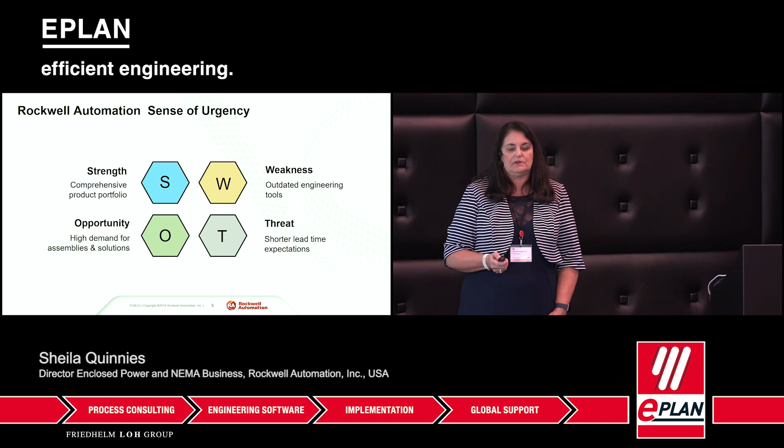And we really started digging into it about 3 years ago, really. When you start looking at how far we've come in the last 3 years, it's pretty exciting. Preparing for this conference gave us a chance to look back and reflect on what we have done.

One of our major activities was to sell more Rockwell Automation parts, services, whatever that was. It's really an ecosystem. We have a strong distributor base working hard to sell our products and services to customers. Then we have Encompass Partners, people we bring into the fold that sell products we don't touch, but help our customers automate their lines. We also work with systems integrators, original equipment manufacturers, and obviously the end users.

As we started looking at this, EPLAN really enabled us to optimize our processes as a whole. We took on way too much all at one time, but looking back, I don't think we'd be as far along if we hadn't jumped into that pool and just started figuring out how to swim.

EPLAN is a good enabler for us, but one thing I mentioned before is whatever automation we put in for ourselves, we have to be able to do that for our customers too. Another speaker said if you don't have your products and data attributes in the database, in the parts library, you're not going to be a supplier. We recognized that and wanted to make it much easier for our own customers.

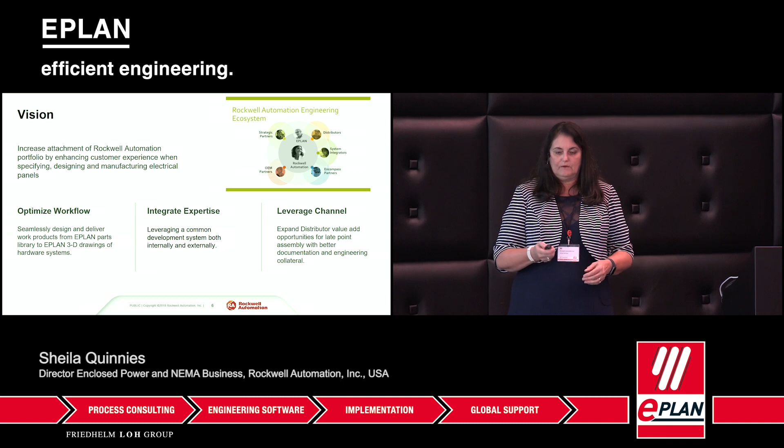So we really saw this as a full life cycle as we went forward with what we wanted to attack. Let me tell you about the good, the bad, and the ugly of what we walked into. We had a big burning platform, a big sense of urgency to do some things.

Before putting in a whole slew of automation, we cleaned up the mess that had grown over 30-something years by different engineers. We modularized our products. Everything was on the table. We looked at reducing the number of enclosures we have, because you struggle with lead time on enclosures, so we wanted to get some standardization.

We changed the power wires we used, limiting the number of power wires and reducing assembly operations time. We also looked at our bill of materials. We're a strong SAP user, using KMATs, configuration variants. We felt that if we could modularize these KMATs like we modularized our products, we'd start taking the friction out of the processes.

So we really had some success standardizing, modularizing, and optimizing our processes. While one team was figuring out the technical attributes of EPLAN, we had another team cleaning up the mess at the same time.

You can see the results: when we first started, we had over 3,000 bills of materials a month with errors, taking on average about 50 minutes to resolve each, from the time it hits the floor to the front office to the engineer and back to the floor. That's 3,000 times 50 minutes, or 2,500 hours a month of downtime. Now you know why your products cost so much. With EPLAN and modularity, we were able to take our BOM errors down to less than 100. It's been a great success for us.

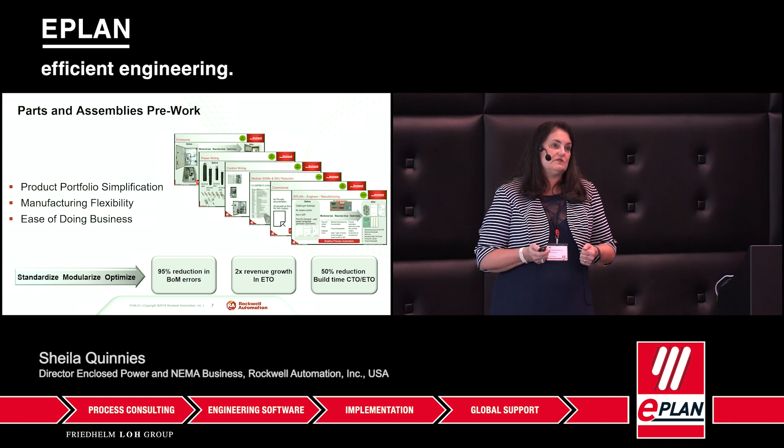So as you look at our overall journey, we had the legacy products, the legacy tools. We had to get rid of those. We wanted to migrate to database and rule-based systems because it's going to give you so much more capabilities, putting it in, being data ready. How do you look at your products differently from an engineering perspective to be a data attribute?

What data attributes are important? So we really started leveraging the tools from EPLAN. And then we did what I call a proof of concept. We partnered with EPLAN to understand it and build it. We took a small assembly and really wanted to test drive the tools and try to prove to our senior management that it was something that was doable.

So as you can see, we had some pretty significant improvements in reducing our engineering time. That helped us to grow. We didn't have to let people go. It just enabled us to go after more business.

And then what you'll really see that's kind of exciting is what they've done with the systems architecture from our systems and solutions that Christoph's going to talk about in a little bit too. All this automation is really preparing us for the future. We really have to do the work to put in the cloud, the virtual reality, AI, all the stuff that you're starting to see becoming more stable. This will better prepare us for that, for the future.

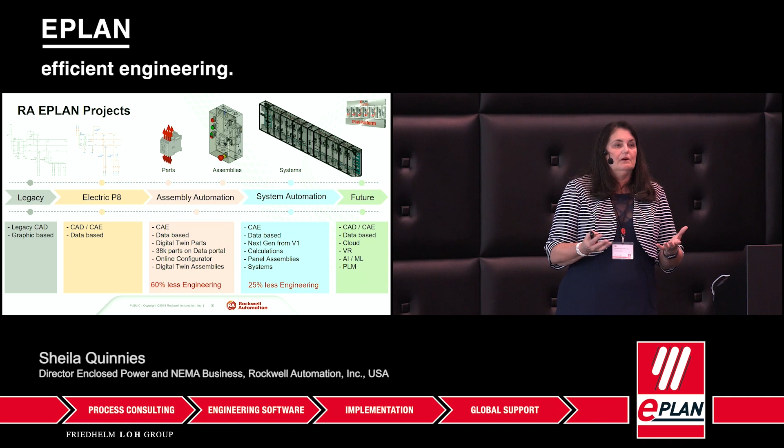Hello, my name is Adrian Kuszper, and together with Agnieszka Saboa, we're going to talk about automated parts generation. We're part of the Rockwell digital engineering team located in Katowice, Poland. One of our main responsibilities is to create the EPLAN parts for a Rockwell parts library.

As Sheila said, we have over 400,000 parts available in our portfolio, and it's not possible to create all of them quickly at once. So in the past we created a schedule using the 80-20 plan, which means by creating about 20% of catalog numbers, we can cover more than 80% of our sales revenue.

But then we asked a question: what about the rest of the 80% of catalog numbers? Or what about the highly configured products that we have in our portfolio? They have pretty high sales revenue as well, so we need to somehow create them too. And it's a huge effort to do that manually, so we decided to use EEC for that.

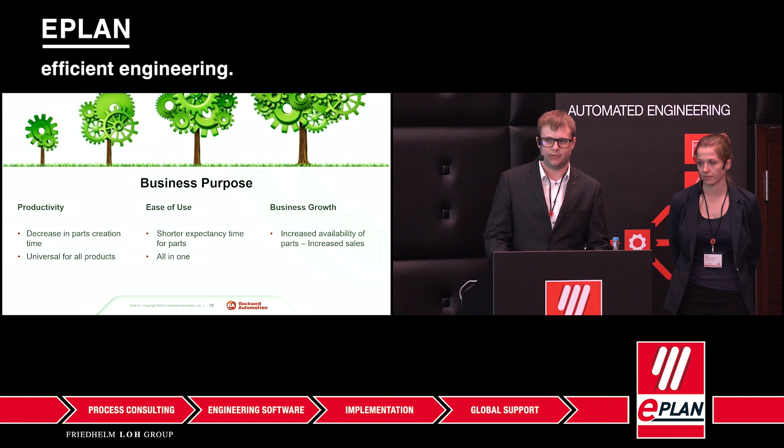What are the advantages of this approach? It reduced the parts creation time significantly. The automated creation is much faster than the manual creation, I think that's clear. Its created model is universal for all the products from a specific product group. It's easy to use. The end user receives the package of data which they need for the projects, and it increases the sales volume. The more parts we are able to generate, the higher the probability for the customer to use it in the project and in fact to buy a product.

Here we prepared an example. Together with Agnieszka, we created an EEC model which is able to generate the parts for an operator device product family, and this is actually our proof of concept that it's possible to automate part generation, and it's actually working very well. This product family is highly configured, so there are billions of possible catalog number combinations.

Once the model was developed, we measured the time it takes to create the part manually versus to create a part using EEC. The result is 15 minutes to create the part from scratch manually, and 30 seconds is the time that EEC needs to create a package of data.

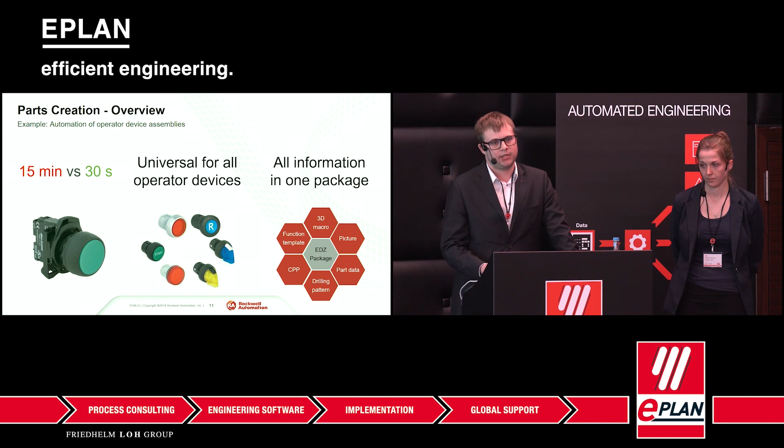This model is universal for all operator devices, like, for example, push buttons, selector switches, pilot lights, e-stops, etc. In the end, the user receives all the information as one package of data, which contains the 3D macro, connection point pattern, drilling pattern, and all the technical data that the engineer needs for the project. Now we can dive into details.

Is this working? Okay, so I will tell you briefly how our model looks like and what we needed to do to make it work.

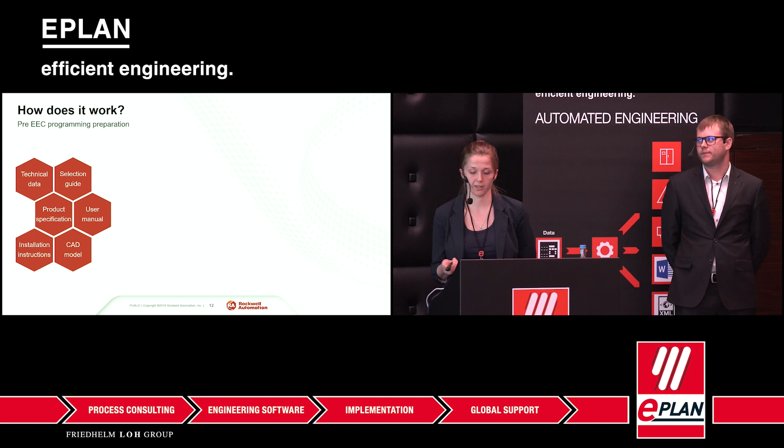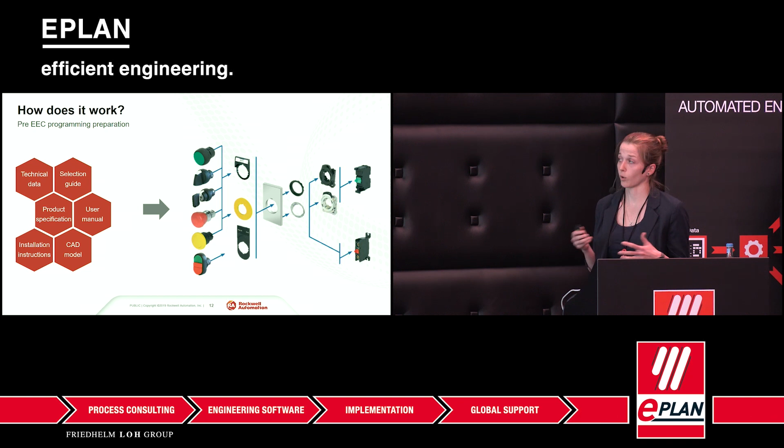First, one needs to go through the whole bunch of technical documentation, like product specifications or installation instructions. The information we want to get from here is what elements are needed for our final part, what are the rules for those elements to combine with each other, and what are the characteristics and attributes of our final part.

When we have this data, we can move to EPLAN, and then we take all the rules and all the data and convert it into the EEC model. We create the necessary libraries with components, build a structure, and apply dependencies between those components.

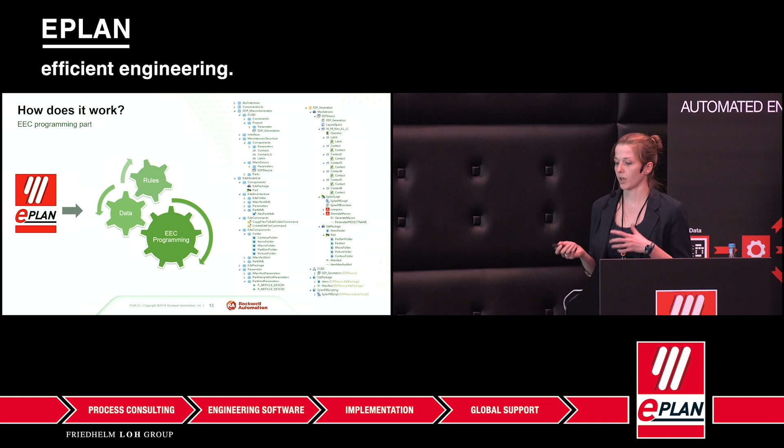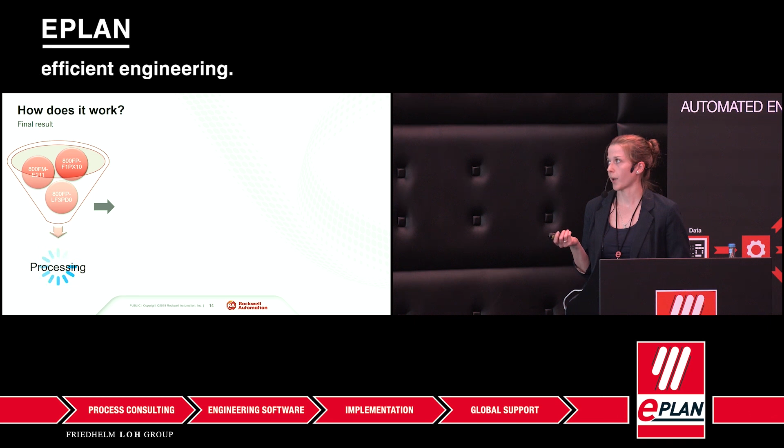Our model's only input is the bulletin number. Then through the EEC generation, we get the package of information that contains everything we need. All you need to do now to be able to use the part is import it to your EPLAN database. And now we have a short video.

I hope it's running. Yeah, so this is our development environment. Here we put our catalog number and we run the generation. This is our output folder. In a moment you will see when the EDZ file appears.

So here is our EDZ file with all our data. Now when the installation is complete, we move to EPLAN. Here I have an empty database, and I go for import of the EDZ file.

And here we have our part. We have all the necessary information that we need. We also provide multilingual input. We have all the descriptions and everything.

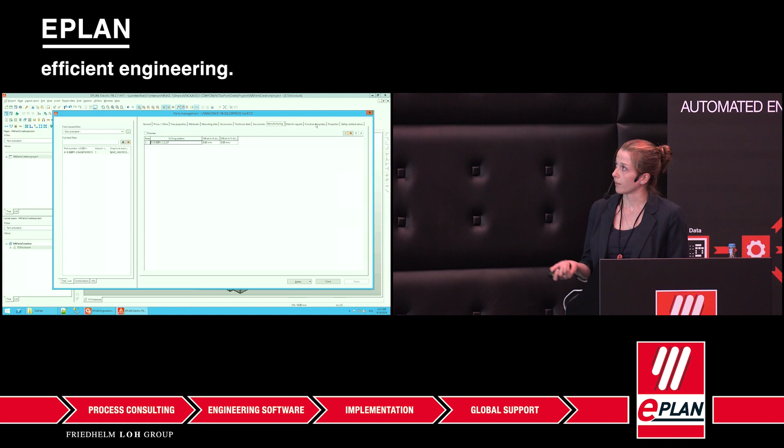We have our mounting data with 3D macro and the picture, our technical data with connection point pattern, the manufacturing data with drilling pattern, and a function template. It is also configured in EEC, and we can assign properties here, not so many because it's just a push button.

And all you need to do now is just insert the device. And since we have only one, we go with this one, we can place it on, let's say, the door.

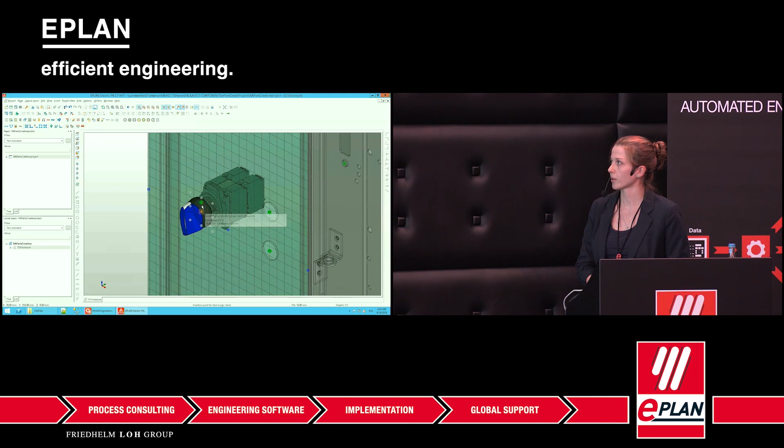And it contains all the information, like our connection points and the directions for the connection points. We also have the information about the drilling pattern.

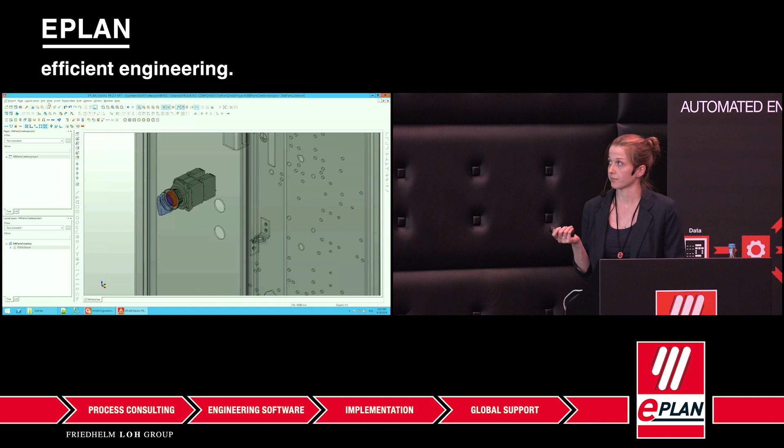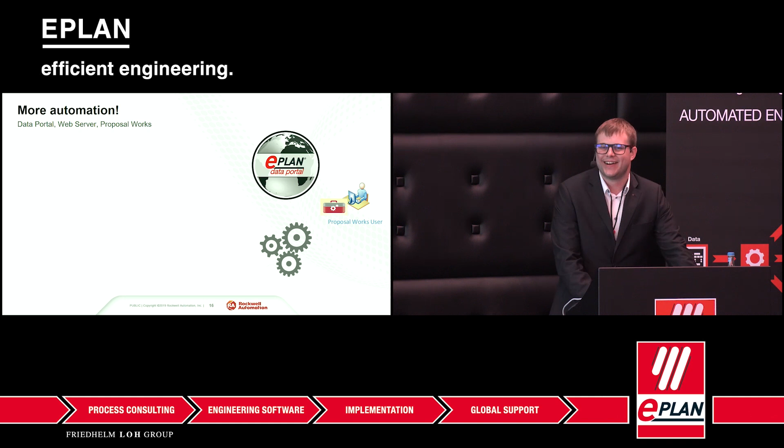Hello? Oh okay, it's working. Okay, what are our next steps with this solution?

First of all, we want to make this solution available for the end user, for the customer. We're collaborating with EPLAN to implement our model and our proposal configuration on the EPLAN data portal, and we also want to implement our model on our Proposal Works software itself.

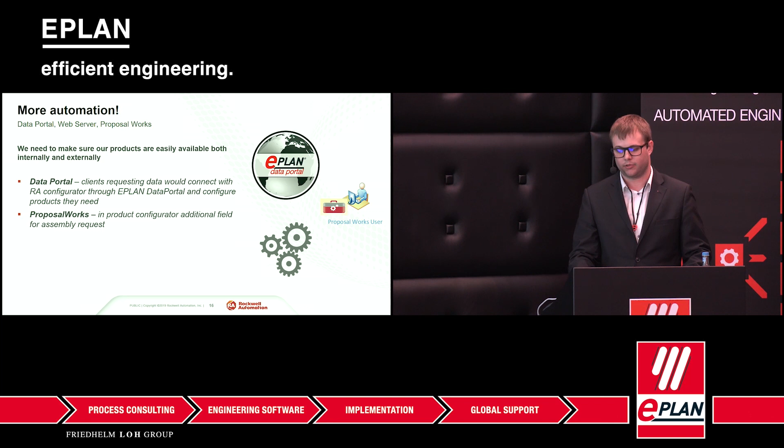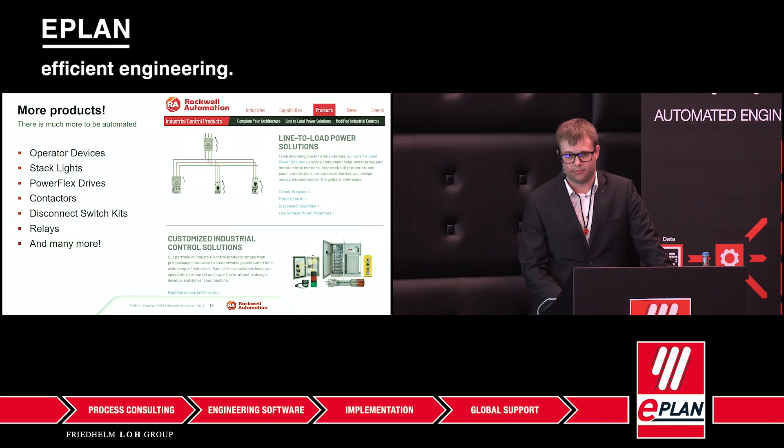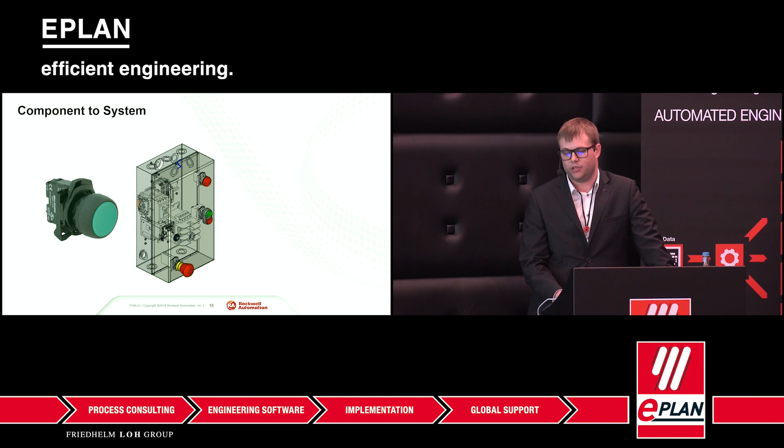Why is this important from a system perspective? Every time we need to start, we get all the individual parts. Then we can use all the individual parts to create an assembly. And then we can use assemblies which we can build into the systems. And now we can move to the systems itself.

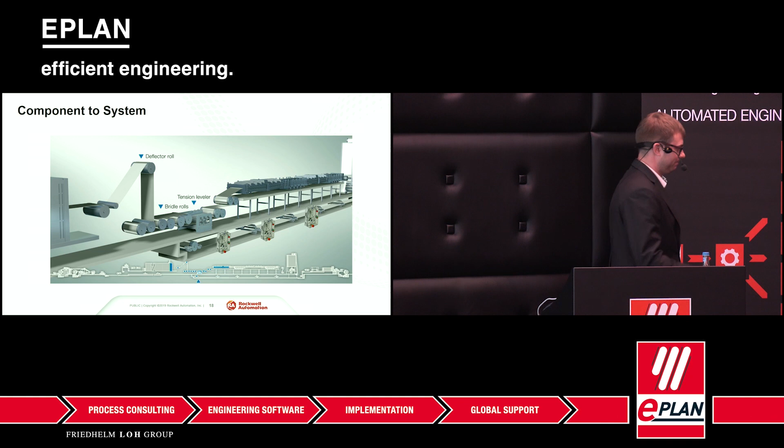Hello, my name is Krzysztof Soligowski. I'm with the system solution business in Rockwell, and I'll tell you a bit about systems and how we use the EEC for those systems.

I'll start off with the connected enterprise. It's an aspect of Industry 4.0, our vision of Industry 4.0 in Rockwell Automation, and it's about connecting the plant floor devices, systems, and those systems into the enterprise level. It's done through the convergence of IT and OT using cloud or edge computing.

Now, the data in that connected enterprise model is process data, which is generated during the machine run or the process run. There's also software data and hardware system data. So what is hardware system data, and what is a system?

A system usually starts off with a machine or a process. That machine has some actuators, sensors, inputs and outputs. It has a logic element to it, which makes it work, and it also has some infrastructure which connects all of those elements together.

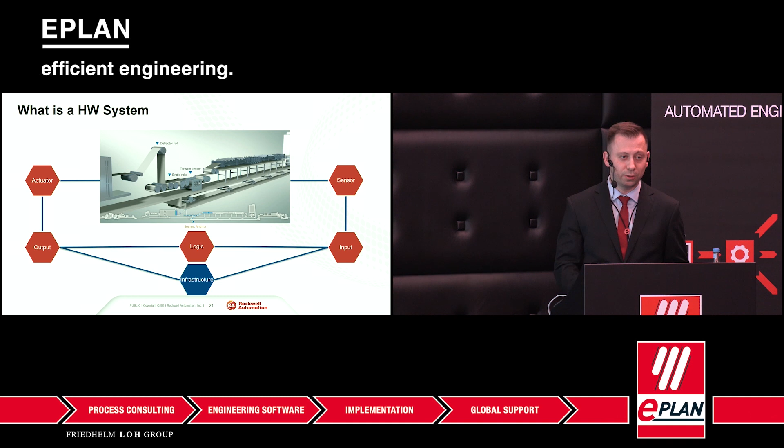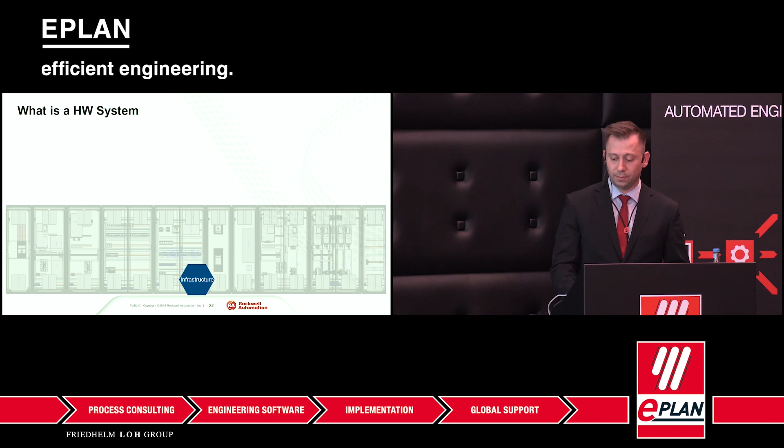That infrastructure, from our perspective, is usually some sort of enclosure. It has some power, some control circuits. It connects the on-machine installation together, and it also connects the bus systems together. So all of those six elements form our hardware system data.

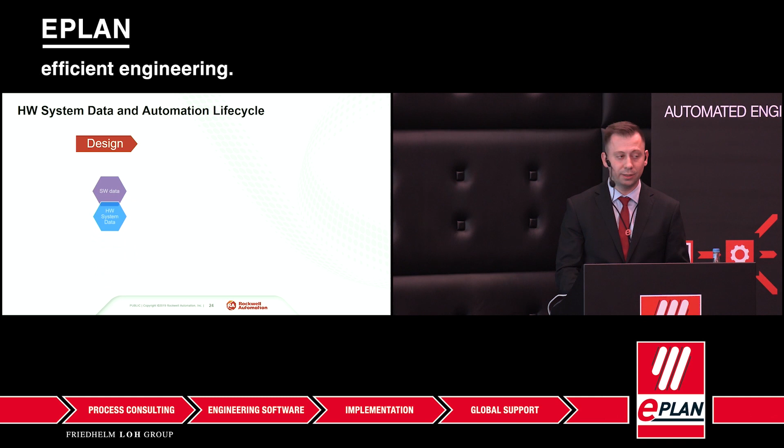Now, if you take that model back and line it up against the automation life cycle, the software data and the hardware data need to be developed at a much earlier stage. So we need to develop that data in the design phase. Let's go into that design phase.

Designing a system is a complex topic. It requires a breadth of knowledge, and it requires multidisciplined engineers who can cooperate across different engineering disciplines and departments.

As that engineer develops his hardware system data, his infrastructure, he needs to move from standard drafting engineering into a digital engineering world, adding more data and complexity to his design.

So that enclosure data needs to be more enhanced. For example, assembly solutions need to be engineered out at the beginning of the design phase, not during manufacturing of the panel. Trunking is no longer a rectangle on the layout. The routing definition is no longer just an instruction for the fitter or wireman on where to route the wires—that detail needs to be entered by the engineer at an early stage. Cable clamps are no longer just a packet of 100 going to the shop floor.

What does this mean? It means the BOM is more detailed, the drawings are more detailed. We all know the BOM is the reason a lot of engineers get up to work in the morning to put it together—it's a lot of work for the engineer. And there's a lot of other system engineering topics that need to be taken into account, so it's a lot of work.

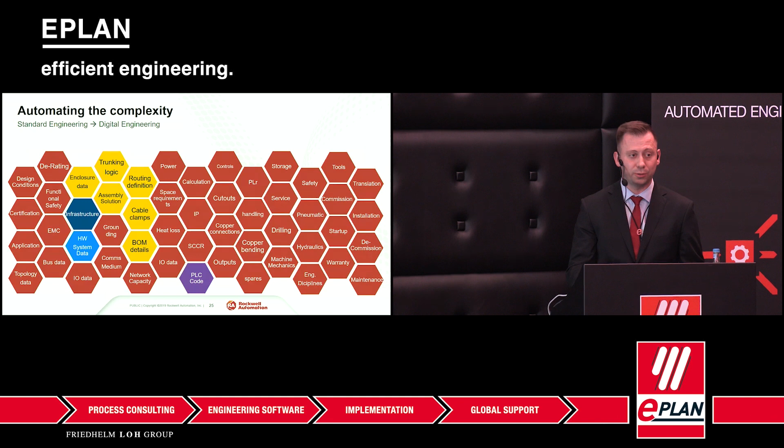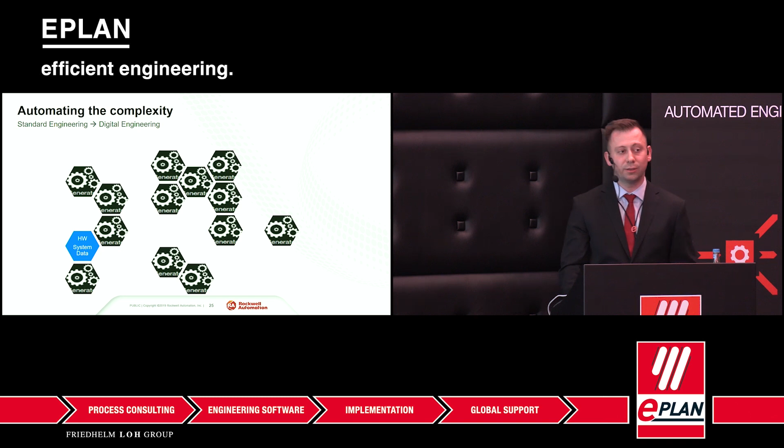So what do we do about it? We need to start automating, and this is where we use the EEC. I'll show you how we used it on what we call the EPLAN V2 project, where we designed and created an EPLAN design tool for our internal use at the moment.

We start off with the hardware system data that we need to create. We defined a set of inputs: a sensor or actuator—an actuator at the beginning with a motor. That motor has a machine function, a control method, and some engineering data, including design conditions, kilowatt ratings, amps, etc.

So that set of inputs, that set of data, is our input data. We used our internal ProposalWorks tool, which is also available to outside users, as a front-end configurator to feed that data into our generator.

So the generator was EEC, and the outputs we generated were a set of documentation. We generated schematics in multi and single line, pro panel layouts. We also added a BOM that was generated, plus a PDF and a 3D PDF of the panel layout. That output formed the hardware system data.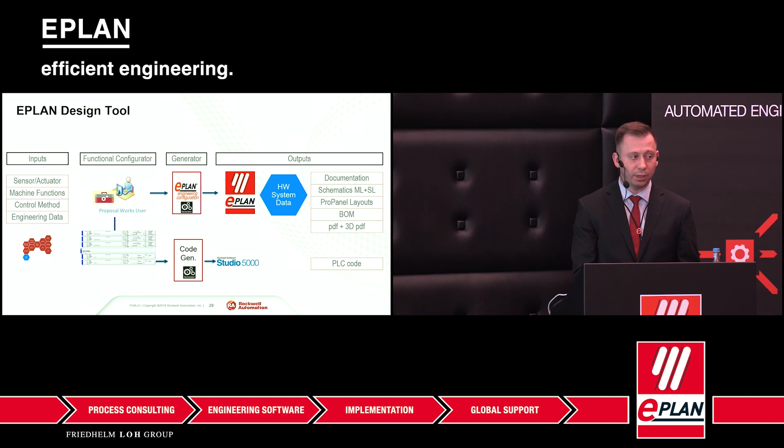We also used our internal suite of software development tools to auto-generate code, and that PLC code formed part of the software data.

How did we align those two worlds together, the hardware and the software? We used the functional approach. When we look at the machine, the machine has a function. The individual elements of that machine have functions and sub-functions, and they have control methods. That's the approach we used in the configurator.

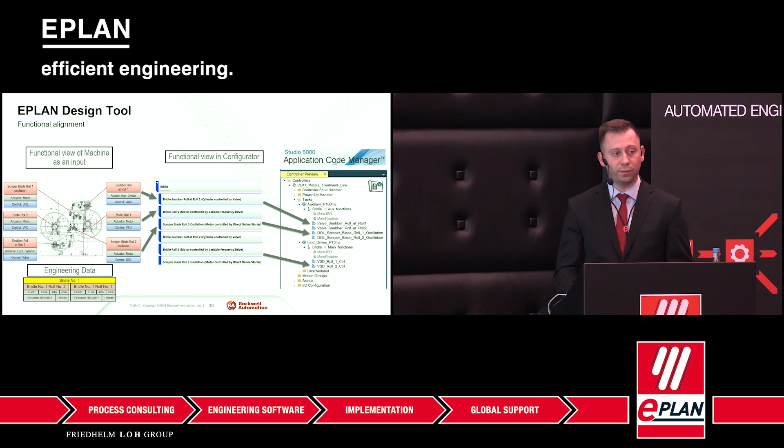Our application code manager, which is our generation tool, also works on the functional approach with a control method for each type of actuator.

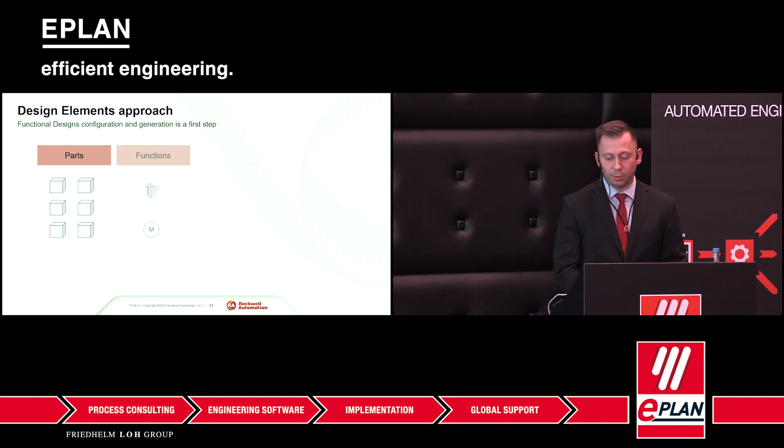So let's have a look at what happened behind the curtain. Our approach was a design elements approach. We started off with parts—a set of parts typically used for our projects. We have generic functions and a set of rules that link those parts with the generic functions, and we generate an actuator circuit.

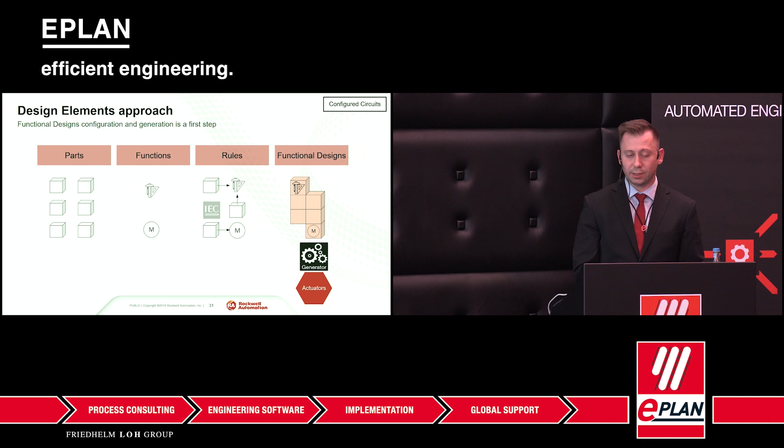So that's a configured element—that was the first step. But then we took it a step further. The challenge around automating a system is that we started off with that actuator function, but then had to include the connections and relationships between the infrastructure of the whole system.

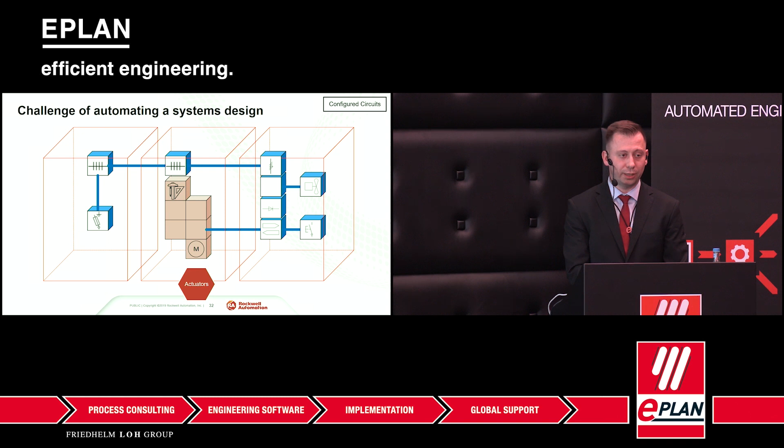So we had to calculate panel space. We had to calculate the power that the actuators and some of the control circuits take. The control circuits also had to be calculated and developed to cover the actuator needs, as well as enclosure needs like cabinet services. We also calculated and generated a set of inputs and outputs to facilitate the needs of those actuator functions.

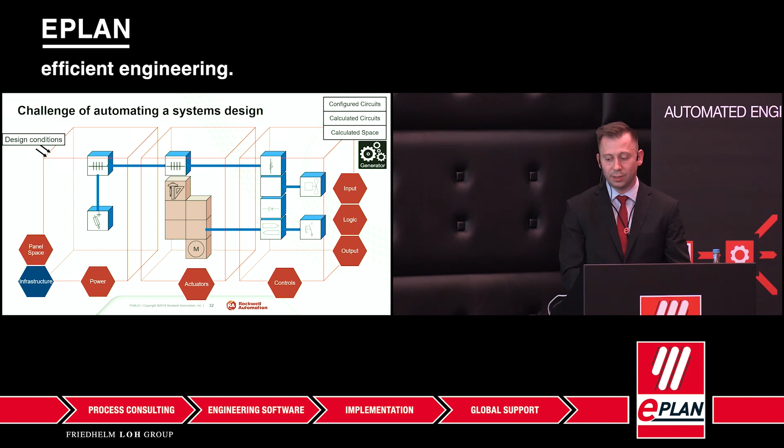So here we combined a couple of things. First, we generated circuits, then we calculated circuits, and calculated space as well.

So what were the outputs of that tool in more detail? We have a structured project. We have a single line diagram for the entire power section up to the control voltage.

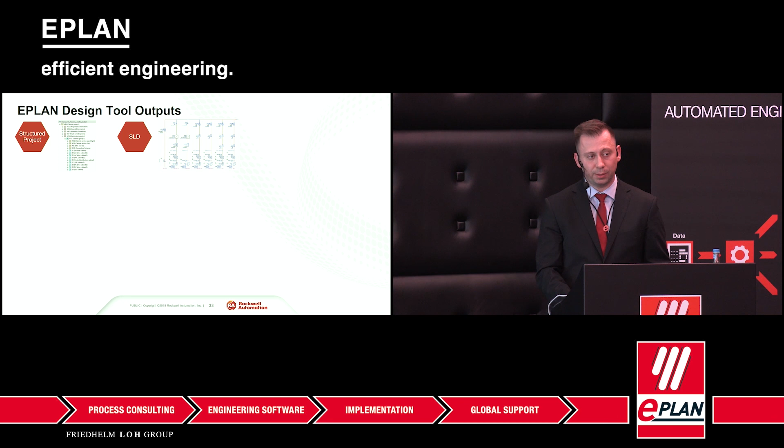We have the multi-line diagrams. In terms of the actuators we generated, we didn't generate all types of actuators. We started off with a motor driven by a VFD or direct online starter, and we generated the infrastructure. The power circuits and controls were calculated.

We generated a grounding scheme for the entire panels that were calculated and generated. Cabinet services were also covered through that generation. So all the fans, air conditioning units, the cabinet lights, those sort of basic elements, that was all generated.

And we allocated I/O for each of the functional groups and their needs. From a layout perspective, we generated the 3D layout of the entire panel suite. It generated bus bars, also calculated based on SCCR ratings, on design conditions, also different solutions for different types of loads, different types of currents.

We also added a spare panels feature as well. But that's not all. So in the future, we're looking into other types of actuators. We'll be looking into automating bus systems, on-machine installation, the safety aspect, advanced routing, and many others.

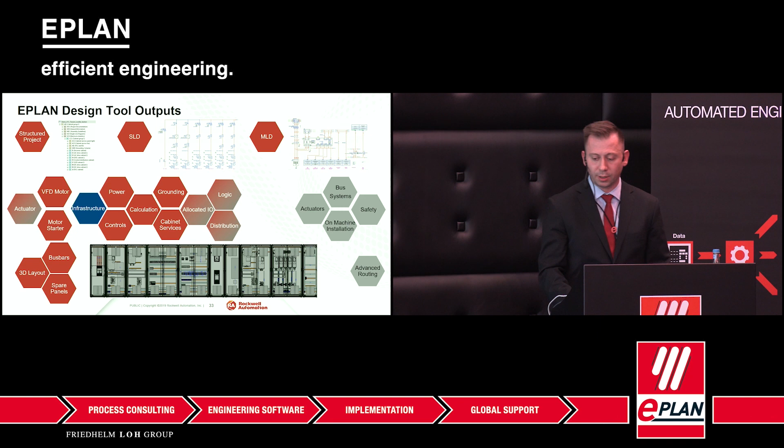So now, if we circle back to that connected enterprise and Industry 4.0 model, we can write a scenario. So we, for example, at the enterprise level, we could have a predictive maintenance task identified at an early stage. We could, at the enterprise level, identify all the locations of our drives across our plants, across the entire globe.

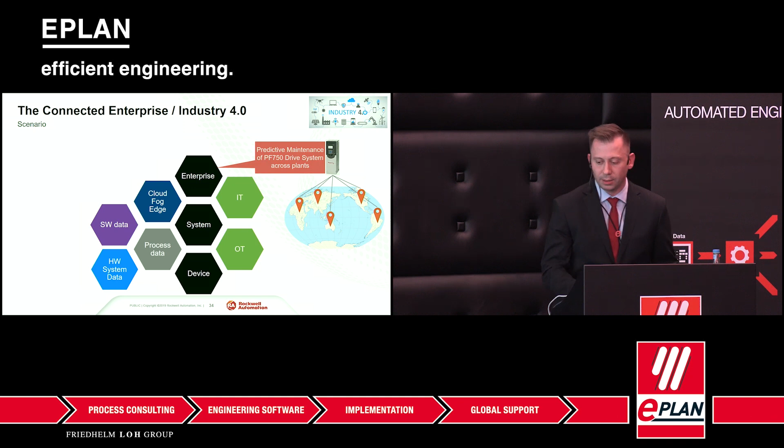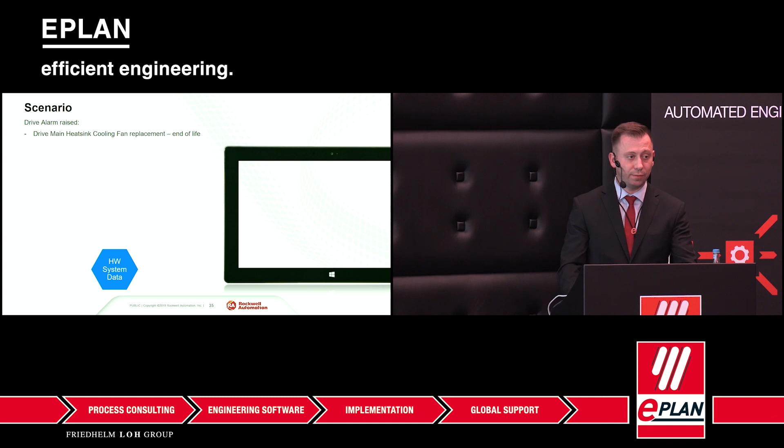And when it comes to actually replacing part of that drive, for example, a heat sink fan in the drive after 5 years, the maintenance team could use that hardware system data we developed at the beginning in the design phase to get a lockout-tagout procedure, to get a technical data sheet, pick up a bill of materials for their work, look at the schematics that we generated, and look at the layouts.

And if it turns out that a cable maybe is damaged in the panel, then they could use that routing data that the engineer generated through that logic piece of trunking. The maintenance team could look at where that routing is placed and how they can replace it quickly.

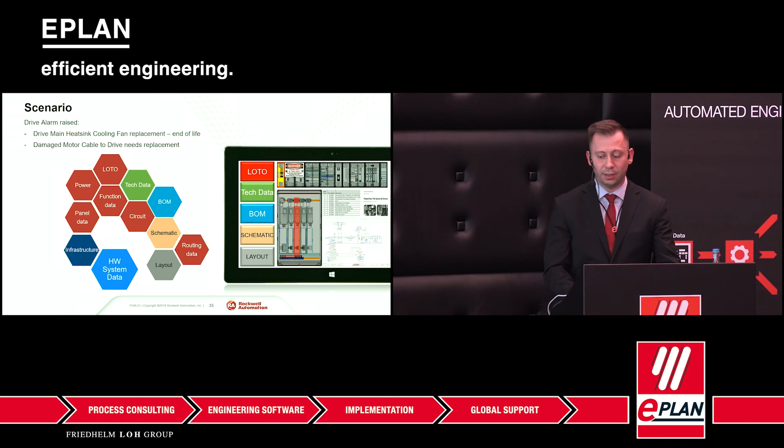So I'll bring it back to Sheila.

Okay, so a couple of things, some recommendations. I mean, we did this in 3 years. It's pretty amazing when you look at it, we were trying to solve a bill of material error problem, and now we're solving so much more complex engineering challenges. So it's really exciting to kind of take that look back.

My recommendation is do it in steps. Doing the proof of concept first to get management's buy-in and see the vision of where you're trying to go really made a big difference for us. And then we did a pilot before we started rolling it out any further. So those are kind of take it in steps, get management's buy-in, I talked about that.

So the other thing is standardize your products and your processes. Don't try to automate a really bad system. Go and clean up the system first and then put in your automated processes. And like I said, you can do it in parallel. You just have to make sure of where you're trying to go.

And do not underestimate the change transformation effort. So Rockwell Automation is an over 100-year-old company. And I'll tell you, when it comes to changing how we do engineering, it's not easy to convince people to see what the vision and the possibilities can be tomorrow.

It took a lot of work of advocating with our leaders across the organization, getting them to believe in what we were trying to do in order for them to invest in it. So we were really happy to be able to, through the proof of concept and the pilot, invest in a team, and now we've turned around and shown the return on investments.

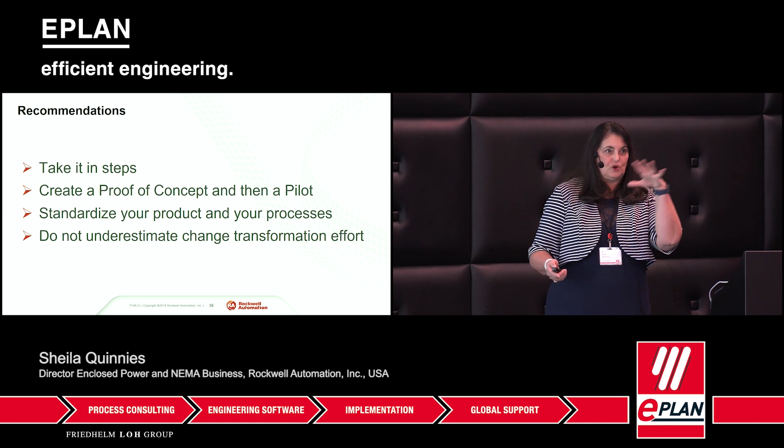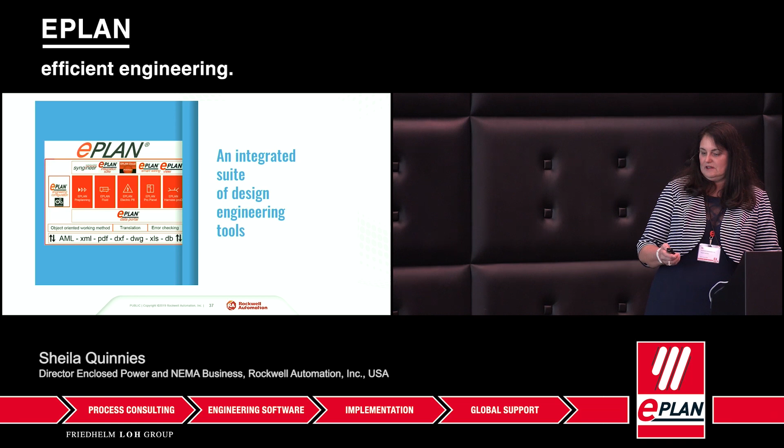So cue the music there, sir. Do I have to start it, or is it going to go?

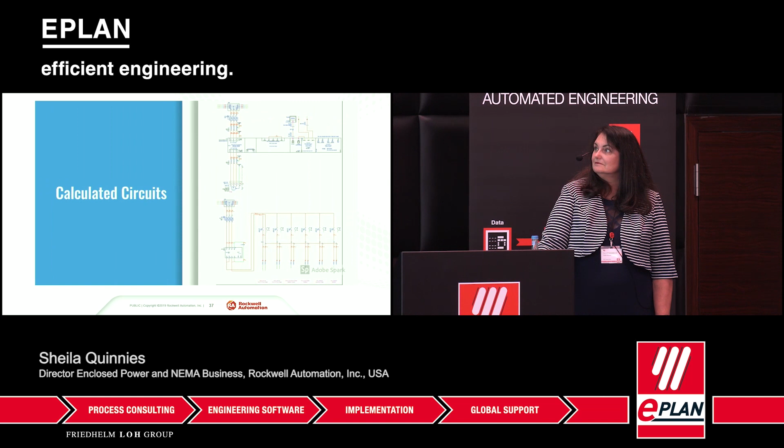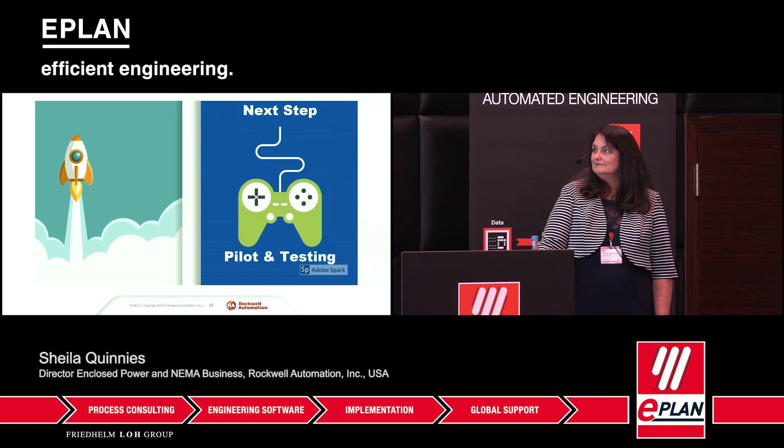Thank you very much.